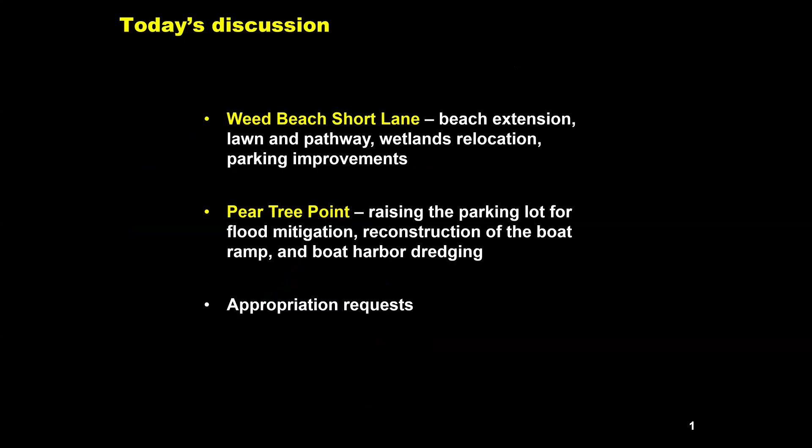If you look back in time on just the Weed Beach story, we acquired the Short Lane property, which is between Weed Beach and Nearwater Lane, back in September 2014. We acquired it for $1,750,000, and it was actually a residence before. If you look at the picture here on the left, it's a map of that property from September 2014, and you can see what looks like a little roadway. That's Short Lane and was the driveway to that house. But we basically had no investment in this property in the more than 10 years that we've owned it.

A serious effort to develop the property started back in 2015, but for various reasons, the town has not moved forward with those projects. So we did develop a plan that was led by Parks and Rec. When they did that, we had an initial placeholder budget of about $1 million. So when the project came back in the spring of 2024 as having a $2 million price tag, the Board of Selectmen asked the Parks and Rec Commission to go back, take a look at the project and see if we could do it for less money.

They looked at several options to do so and concluded that we really couldn't get the property to be what we would want as a community unless we did everything that was originally planned. So they put it out for bid again. That time in the spring, we did not get any bids because of the way the schedule for the project was configured. We then put it out for another bid after adjusting timelines and breaking up the project a bit, and we got 5 bids this time, and we now have a winning bid to do this work.

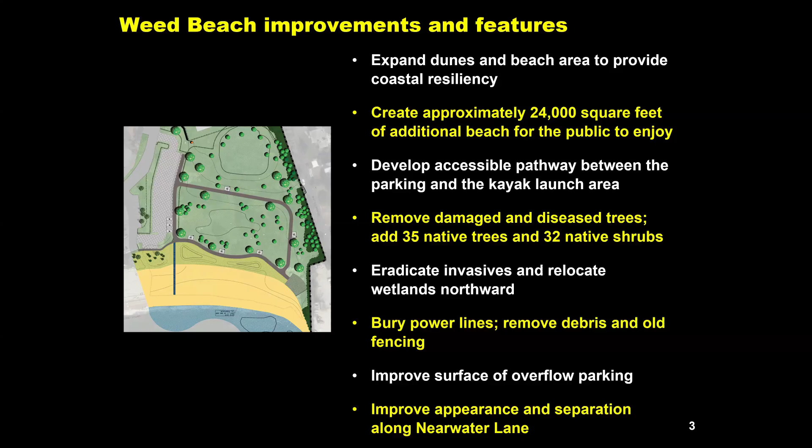We're going to create a fair bit of extensive new beach for everyone to enjoy. As Lori has said on numerous occasions, we have a lot of multifamily housing coming into town, and a lot of those folks don't have yards or outdoor spaces to enjoy. Extending Weed Beach, which is regularly rated as the top Parks and Rec destination in town, is something that both the Commission as well as the Board of Selectmen are in unanimous agreement that we need to do. There's lots of other important peripheral things we'll do too, like removing invasives, burying power lines, making sure that we have adequate and resurfaced parking, and generally improving the attractiveness of this entire area.

In terms of the specific project, you'll see here in this drawing, we've got a parking area on the left there that's an existing parking area today. It's not in really good shape and it has degraded somewhat. You can still park there, but it's certainly not attractive. So what we'll be doing is cleaning up that area, re-graveling that parking lot and adding a stone swale.

In addition to clearing invasives and installing that berm, all of that's going to extend left to right and create a beach footprint that exactly matches what we have in the rest of Weed Beach today. We're also installing landscaping and screening consistent with the desires of the residents who live along Nearwater, and we've been in active consultation with them.

And then we're also going to create a lawn area in between the wetlands, similar to what exists today, and surround that with a pathway that is going to be compliant with the Americans with Disabilities Act.

I'll pause here for a moment because that pathway has created some controversy. Both the commission and the Board of Selectmen, after extensive discussion, have accepted putting this pathway in. And it's pretty important because for both of our beaches today, we do not have any ADA compliant pathways.

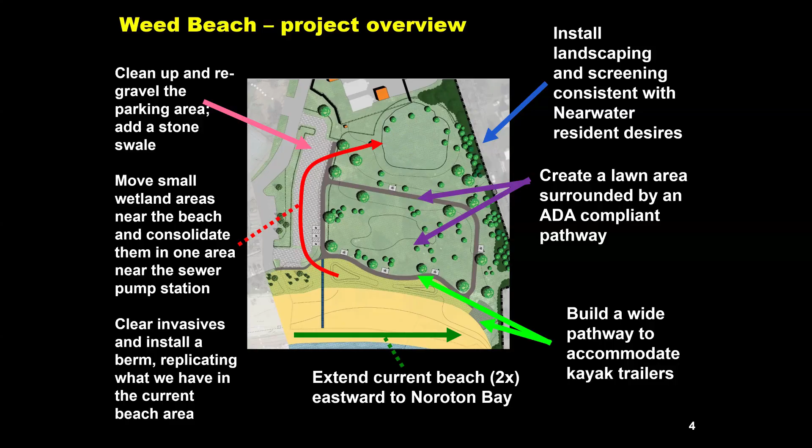And then finally, at the very bottom there, you'll see that pathway. It's actually going to be a little wider than shown because we need something to accommodate trailers for folks who have kayaks and need to transport them all the way over to the right side where kayaks will continue to be based.

So in terms of frequently asked questions, I want to turn this over to some of my colleagues. The first one to talk about is flooding. Some folks have had concerns that maybe this redevelopment would make flooding worse. Dan, could you give us your expert view as to why this actually makes it more flood resistant?

Yeah, so the proposed improvements, making this into a lawn open space, actually allows for any waters, whether it's stormwater or wave action, to be absorbed into the park space. As John mentioned, we're going to be extending the dunes that currently exist in the parking areas into this space, and those allow that absorption for wave action when there is a storm event in the bay, so it doesn't flood into the lawn area.

Also within the space are wetlands that are going to be restored by the pump station side of the park area, which acts as a sponge where rainfall or storm events occur, taking in water. Some water from nearby lanes comes in there as well, and the park space handles water and allows infiltration, which also improves water quality in the overall park space.

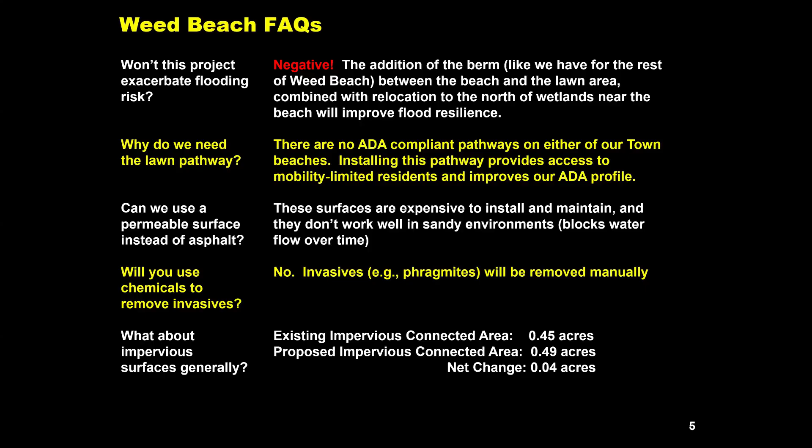Got it. Okay, so a few other questions that have come up. One of them is just on what about new plantings, and some of the trees that we took out - that was a little controversial - but we've got 98 existing trees, total of 51 removed, and these were trees, saplings, some damaged trees, some invasives, and you're adding 36 new trees both on the property as well as along Nearwater. Is that correct?

So we have trees within the open lawn area around the perimeter, and also we made an effort, at the request of Nearwater Lane residents, to increase shrubs and seedlings within that buffer zone between the roadway and the park space, to preserve some views but also provide a sound buffer for residents and protect views into their lawn areas or properties.

The seedlings would also be part of the wetland reconstruction, so that wetland will have not just grasses but vegetation that can grow, allowing for successful ecology and environment for habitat growth within the wetland space. Got it. Okay, so we've covered wetlands.

Lori, if we don't do anything about this property, and we've had it for an awfully long time, would you care to comment on why the commission feels that now's the time to get this done? Sure, John. The area in question includes not just the Short Lane parcel we acquired, which was give or take an acre, but the surrounding property. So the total project is just shy of about 5 acres, I believe, Dan.

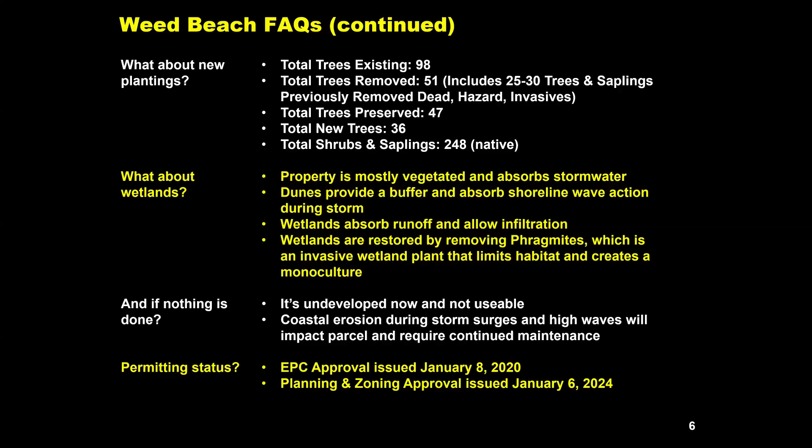You'd concur with that, Dan? Absolutely. Okay, all right, so let's turn our attention now to the other part of this discussion, which is the Pear Tree Point project.

By way of background, one of the things you have to do to get a dredging permit is test the sediment that's going to be dredged out. That testing determines whether it is overly contaminated and needs to be treated before disposal, or if it's relatively clean and can simply be dumped into Long Island Sound.

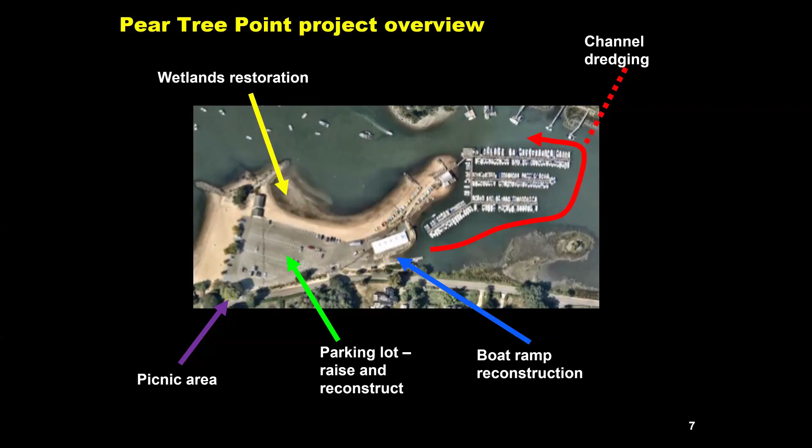Fact is, a difficult thing to think about with this project is that it's the ultimate, maybe important but not urgent investment. Could something like this wait a year? For sure. Is it something we really need to think about doing in any case? Yes. This is an important coastal asset, both for our boaters as well as those who enjoy a beach environment. And as a town, both the Parks and Rec Commission and the Board of Selectmen unanimously agree that it's time to make this investment and ensure we preserve this important asset for generations to come.

So here are a few site statistics. I'm not going to go through all of this, but I did want to point out a couple. One is in terms of parking places: the spots painted on the lot right now are actually too small to meet standards for how large parking spaces should be. So there's actually going to be a small net decrease of about 10% in our existing stall count. Fortunately, on most days the beach parking is not completely full, but as part of this improvement, we need to make sure our parking spaces are compliant with code requirements for length and width.

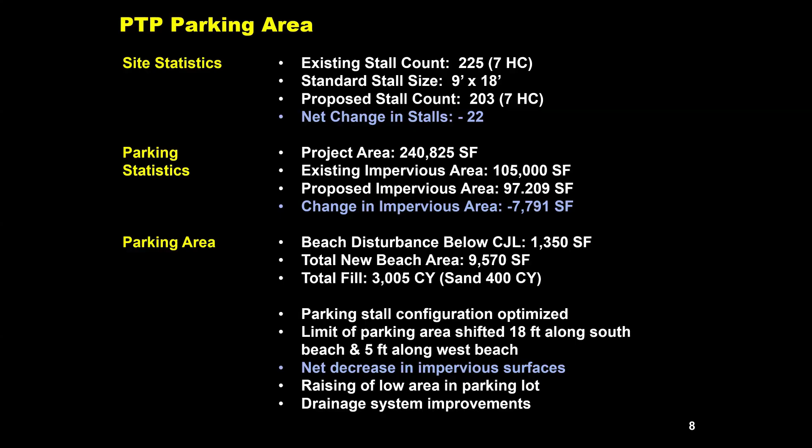There is going to be a decrease in net impervious area. The reason for that is not just how we're configuring the beaches, but also some additions of islands, if you will, in the parking lot that will have landscaping and trees. That actually makes parking safer and more manageable, and also increases the green space there. And then finally, by raising this parking lot, we really do have less of a chance of flooding. When you combine that with some drainage system improvements, we should be far more resilient to flooding in that area than we are currently.

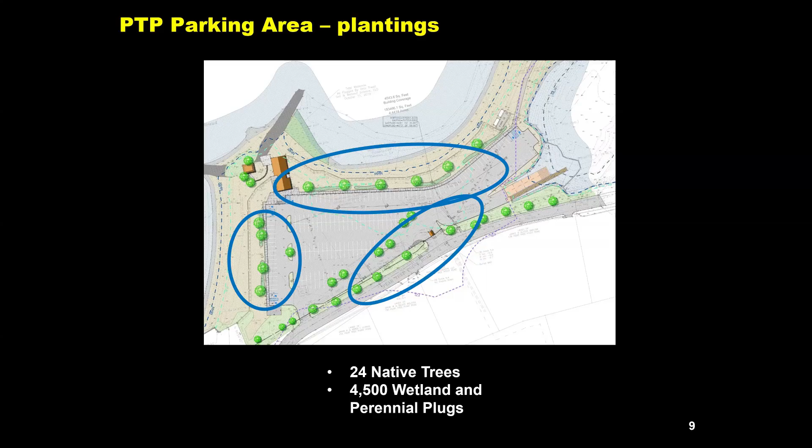Further to that, I mentioned we would have plantings, and you can see how we would deploy those plantings here, both in islands within the parking lot itself, as well as on the side. We don't have a lot of those plantings at all right now, so it's going to significantly improve the appearance of Pear Tree Point Beach and provide an extra bit of green that I think is going to make a big difference.

What if nothing else is done? I'm going to turn this over to Dan. You've looked at this, and maybe Laura, you can comment as well.

The goal is that as the elevation of the parking lot is raised, the severity of this erosion and the sand migrating into the parking lot is less severe, if not eliminated. Providing this protection on a sunny day and during a storm event means really making improvements to invest in the park space, so that users can enjoy it during normal sunny day experiences, but also be protected during the high storm events that are occurring more often and more frequently in our current environment.

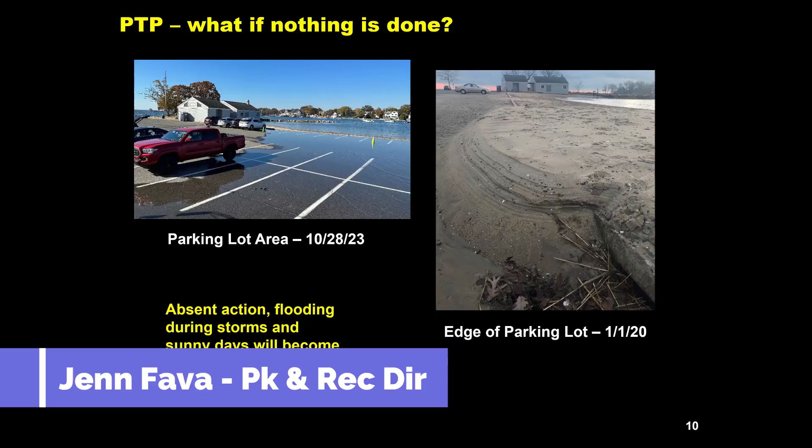Okay, Jenn, comments from you? I think it's just important to also remember this will help with water quality. I know a lot of our residents are concerned with that, but because of this new drainage system going in, it will help with the water quality as well.

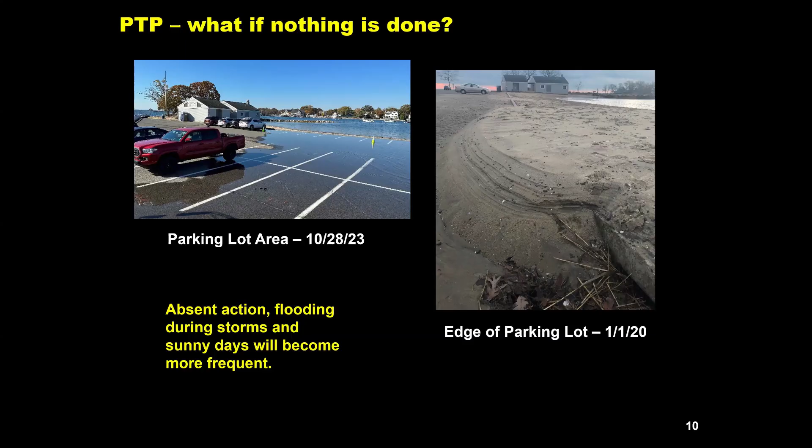Right, because every time you have a flood like this, if there's oil or contamination on the parking lot, that goes back into Long Island Sound. Correct. We will fix that with this.

Good point. Exactly. Okay, in terms of permits and approvals, I think we're all caught up on this, Dan, right? And if we pursue this project according to the timeline, which we'll cover in a minute, it looks like we're covered for all the permitting we need to do, correct?

Yes, this started a number of years ago. The first permit was the certificate of permission by Connecticut DEEP. That's basically the state allowing us to do all improvements below the coastal jurisdiction limit, including the dredging. That expires in October 2027. Next was the Town of Darien's Planning and Zoning approvals, issued in February 2025. And finally, a U.S. Army Corps of Engineers general permit, also part of the dredging component, issued in May, expiring in 2027. So we are all approved and permits are in hand to execute the work.

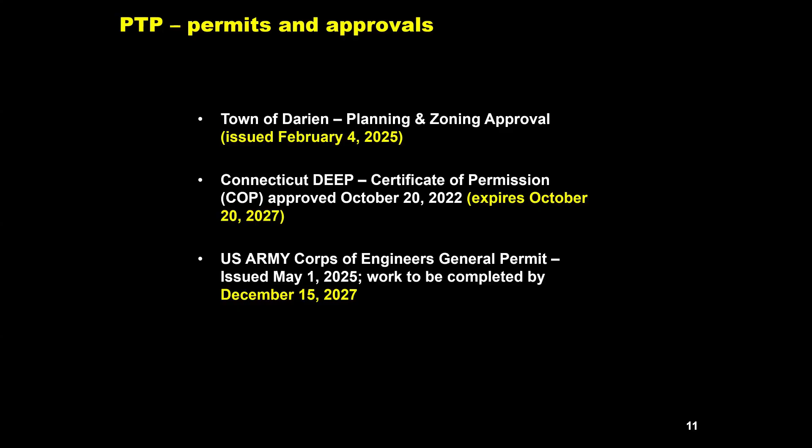So if we get the project done based on the timeline we're about to discuss, we won't run into any permit expiration. So that's good news.

Okay, so let's talk a little bit about the appropriation request itself for both of these projects. We'll start with Weed Beach. One thing that's interesting to note is that for the 5 bids we got for Weed Beach and the 2 bids we got for Pear Tree Point Beach, it ended up that Yield Industries is the firm that got both of them, so they're going to be doing both of these projects.

And Jenn, you did some reference checks on those guys, correct?

Dan did the reference checks. Positive reviews, I take it, right?

Yeah, so for each of the 2 projects, we interviewed references for the 2 apparent low bidders, multiple resources, so over 7 references for each of them. Yield Industries had rave reviews on current and past projects, varying scales and different experiences.

We did a thorough review of their work, which includes the land side and the dredging component. We also looked at who their team was composed of, and we interviewed them to verify their bid and their understanding of the project so we can get them in and hit the ground running. Thankfully, they looked good for both projects, so both reviews were great.